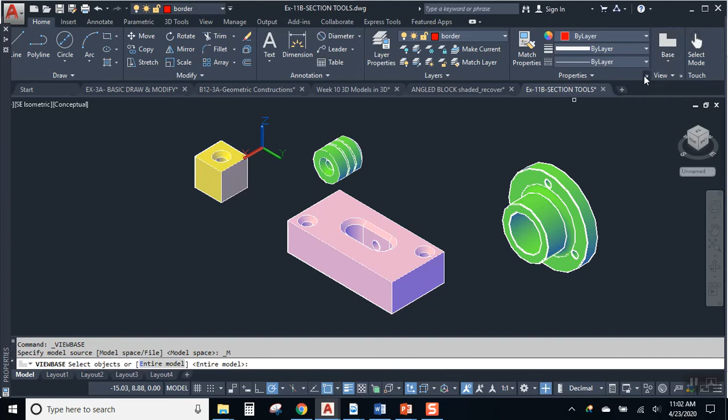Alright, so our first step is let's go to layout 1, let's see what's on it. The answer is nothing. Go back to our model. And I'd like you to use the base view command to take that first object from model space and stick it over onto layout 1. Alright, now notice when you're placing this, it's showing you the front view. That's because up here, it's selecting front view.

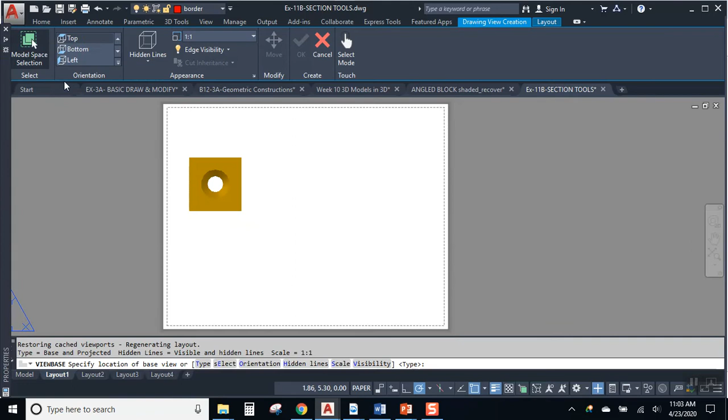We can switch this to whatever we want. We could switch it into an isometric view. We can switch it into any of the standard views. And I'd like you to switch it to top. See, this is what I'd like to see. Top view. Okay, so you can pick the view you want to have as your parent view. And then we're going to pull it down here. And enter. And that's going to give us our top and our front view, two standard views, right?

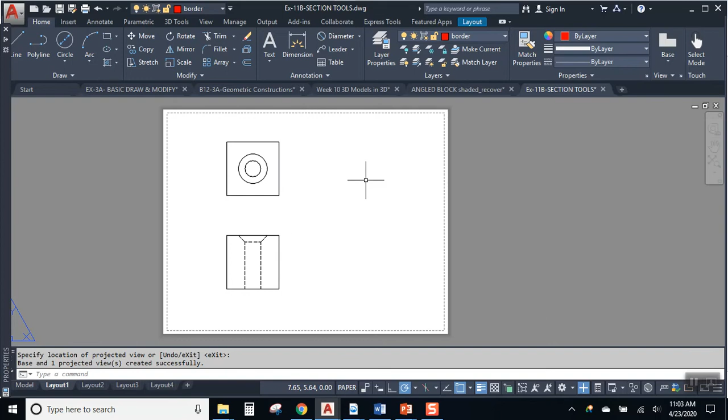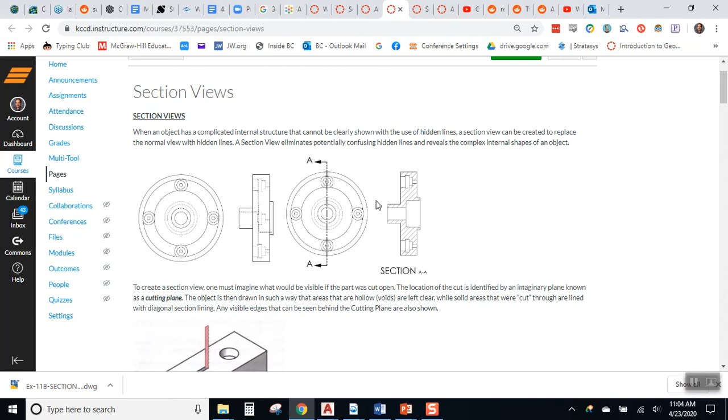So now what we can do is we can work with some of these specialized tools to create some special views. For example, I'd like to take the front view and I would like to section it. Okay, so do you remember what that means? This is one of the things we considered in the B12 class, making section views. Section views are designed to clarify where objects are solid or hollow in their internal structure. A lot of times they're less confusing than working with hidden lines, especially if the part's very complex.

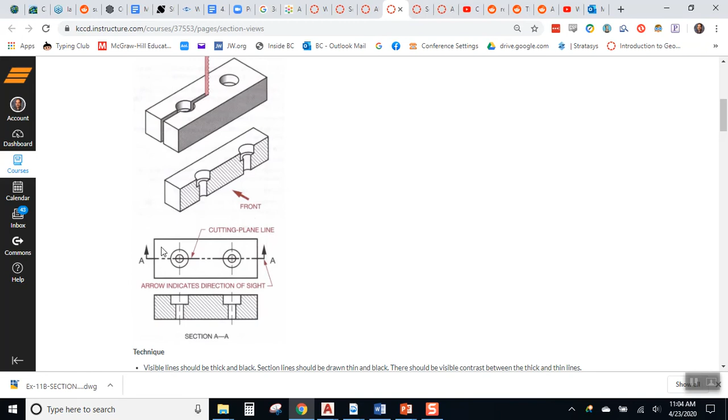So the idea is basically we're sawing through the part. We are representing the solid parts by filling them up with hatch, and then the parts that we didn't cut through anything, well, they're left blank. So on our little block here with a couple of counterbore holes, here is our top view, and here is our cutting plane line, and here is the section view that results.

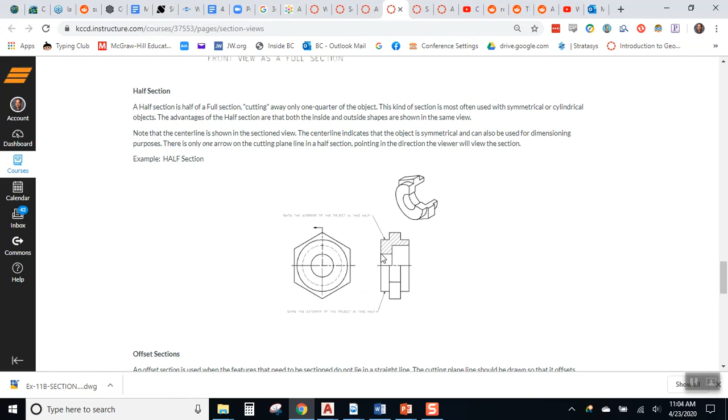Now, there's a bunch of information over in Canvas for you about sections, and we know there are full sections where you cut the object completely in half, and the resulting view is fully sectioned. There are half sections where only half of the view is sectioned, and then there are offset sections where we're cutting through a number of different elements and showing how it looks where the cuts are. Okay? So you can take a look at Canvas if you need a refresher, or you can take a look at your B12 course pack.

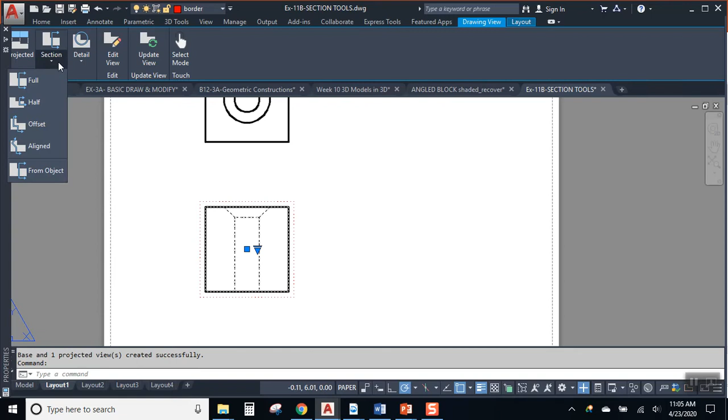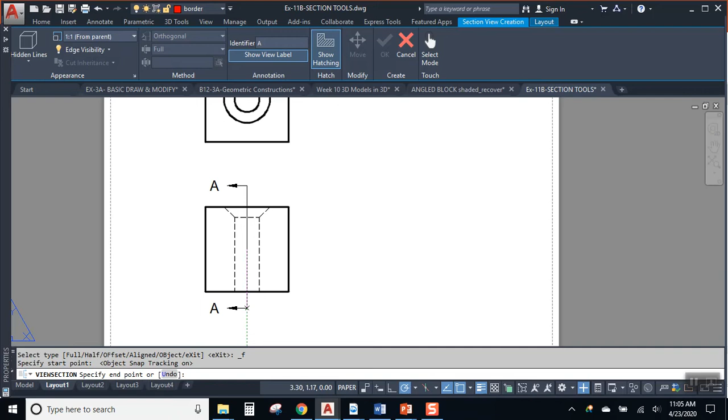But basically I want to go in and I want to say, hey, I want a section and I'd like a full section. So I'm going to use the full section tool, and what I'm going to do is I'm going to line up with the midpoint on this edge. I'm going to go click, I'm going to go click, and that is my cutting plane. Okay, now it's thinking, and as I move my cursor off to the right, we're going to see some magic happen. Alright, do you see the magic happening?

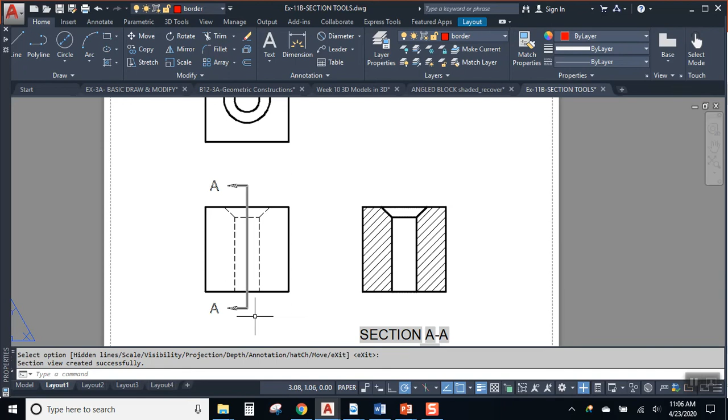So AutoCAD's able to look at your 3D solid, you determine where you want to cut open, you put a left click where you want that section view and hit OK. And now there's a fully sectioned side view off of that front view. Pretty snazzy, huh? Yeah, so it adds the cutting plane. It adds a couple of letters to identify the section. It even tags it over here and tells you the scale, which is nice, right? So that is making a section, and we can do it off of any view.

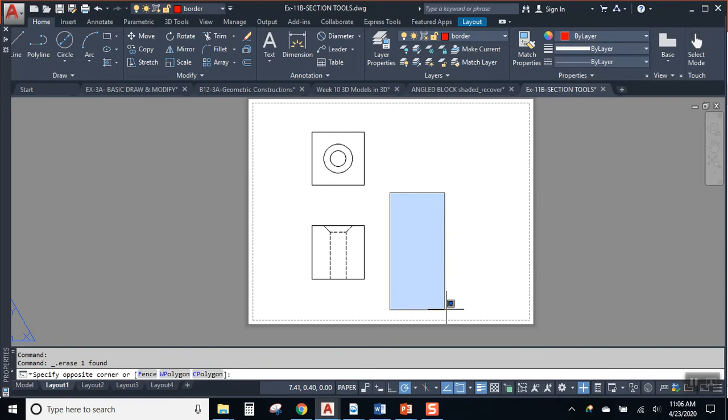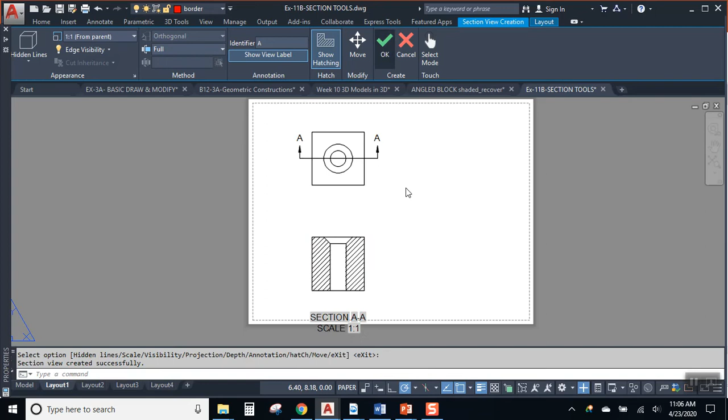I'm going to do this. I'm going to get rid of the cutting plane line, and notice what happens when I get rid of the cutting plane line. You see how the section view disappeared? Because the section view depends on that cutting plane. I'm going to get rid of the front view, and I'm going to click on the top, and I can run a section through the top. I'll just use the center point of the hole as my location. Alright, and now my front view will be drawn as a section. Looks pretty nice.

Okay, let's go back to our model. So that took care of our first model, our first solid. Our second one's going to be this guy here. I'm going to run a base view from model space of this part.

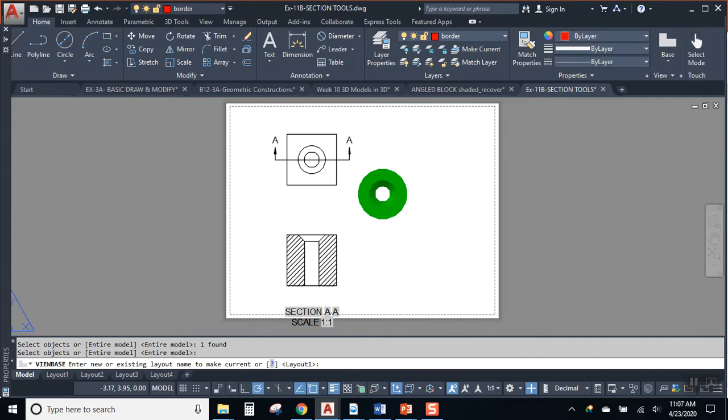And whoops, I don't want it on this sheet, do I? So let's go back. Let's go to our next layout, layout 2, which is blank. Okay, now I'm all queued up and ready to go. Now when I do this, AutoCAD will know, hey, go to the last active layout. I'll pick this guy. And now here's what we got, right?

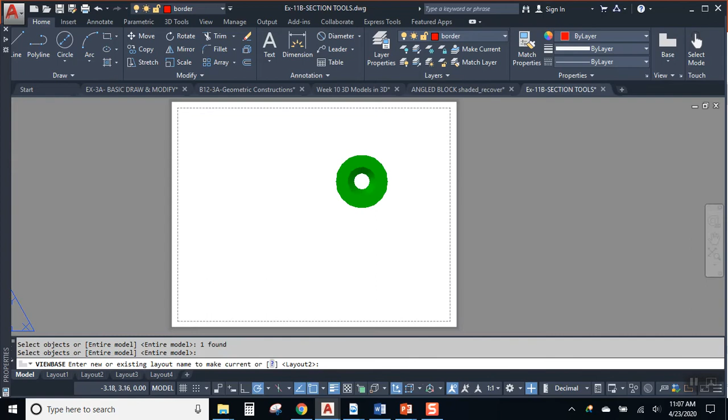So I would like the front view on this one. And that's all I want. So I'll hit OK. And I'll hit Enter. And there's my front view. All right, so that's confusing. There's a lot of weird stuff going on there. So what we'll do is we'll click on that front view, and we'll say, give me a section. But this time I want a half section.

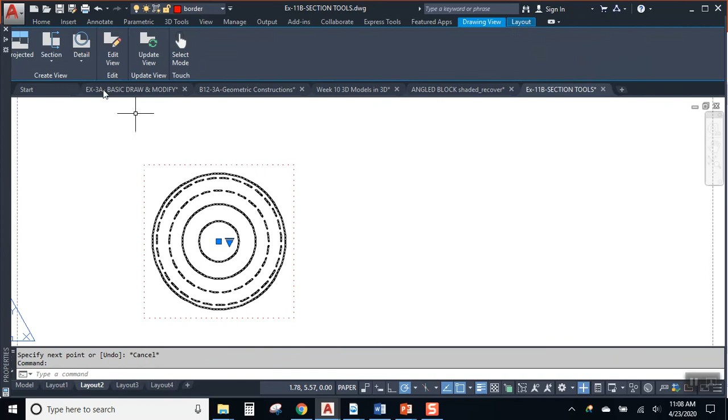So now check out how this is going to work. I'm going to find the center point. I'm going to track over. I'm going to start my cutting plane. No, I'm not going to do that. I'm going to start a half section. I'm going to find the center point. I'm going to track up. Now, what I want to do is this. I want to cut through it from the top to the center.

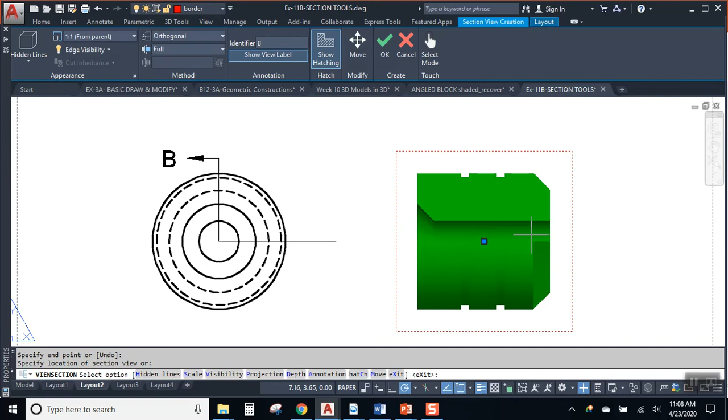And I'm going to left click out here. And on that second click, do you see what happened? It's generated my view. I will left click out in space and hit OK. And now check it out. The top half is sectioned, right? Because we're cutting out that part. The bottom half is just what the part looks like on the outside. Pretty snazzy. Okay.

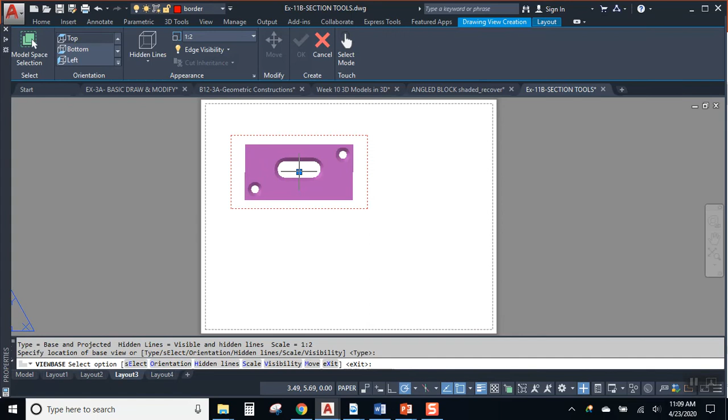Let's look at layout 3. Layout 3's got nothing on it. I'll go back to model space. I'd like to take the tissue box looking thing here. I'd like to send that over to layout 3. So select, stick it on there. This time I want the top view, and I'll hit OK. I don't want any more views, so I'll hit Enter. Okay. And here we go.

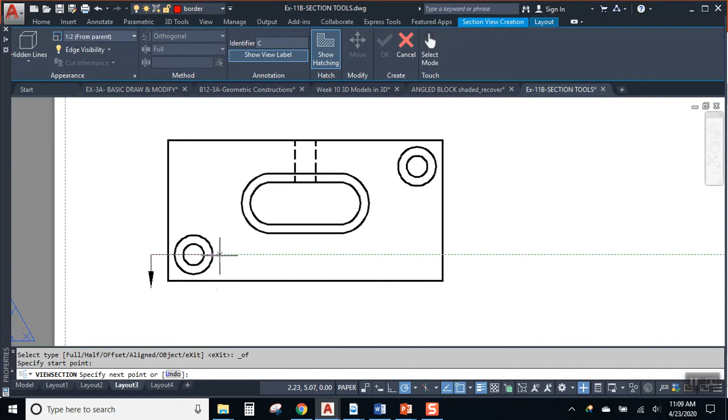I'm going to pick section. I'm going to pick offset section this time. And now check it out. I'm going to line up with the center point on that hole and click and go through the hole. And then when I get a little bit past the hole, I'm going to click again. And that's going to let me bend my cutting plane line. Okay, and then I will line it up.

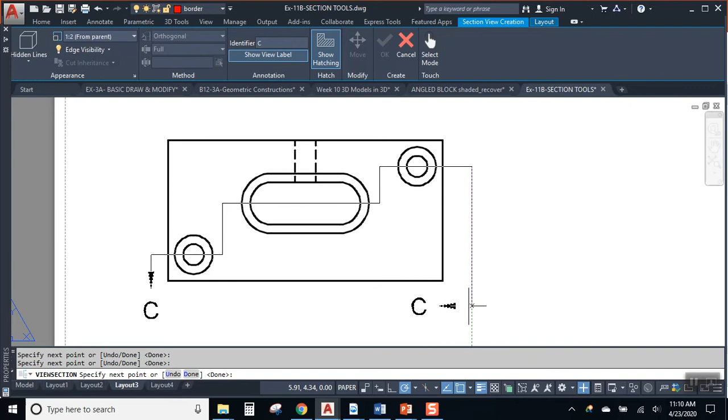With the next element. And then I will bend it up again. I will line it up with the next element. And click one last time. And then when you're all done clicking, hit Enter. And if we take a look, we see our cutting plane has zigzagged through the part.

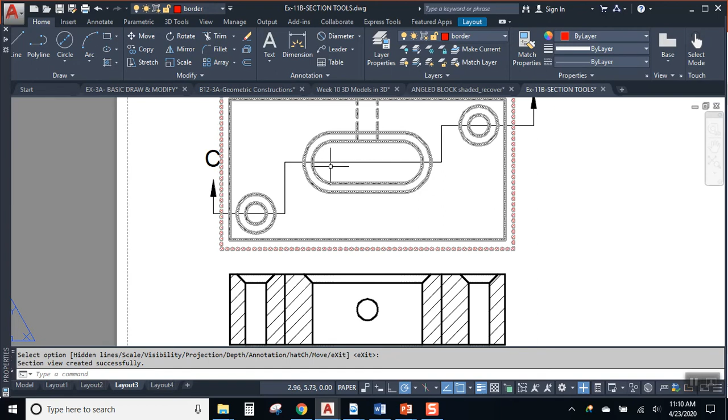And then down here in the front view, it's going to create a view that looks exactly like what this would look like if we sawed through it, right? Because the hole here and the slot and the hole here are not in one straight line, but the cutting plane is passing through all of them and showing us what we would see if we did cut through all of them. Okay, so that is our offset section.

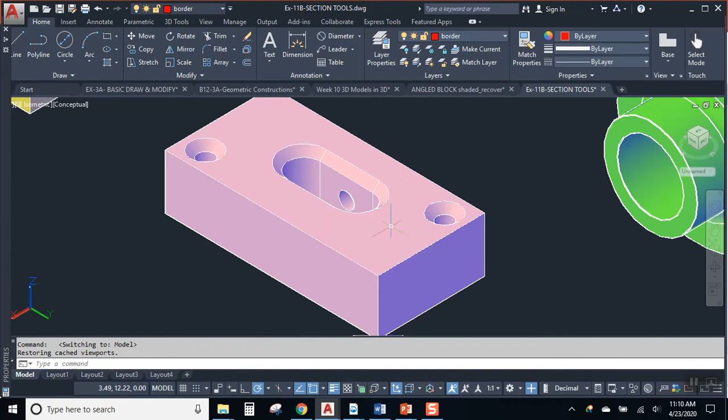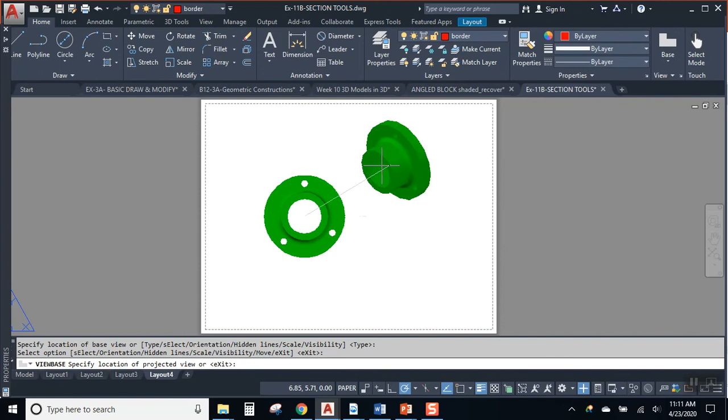Let's go to layout 4 now. Here's our last layout. Let's take a look at the model. This looks familiar, doesn't it? This is something that we drew earlier in the semester. This was that rod support, except now it's a 3D model. We're going to go to base view from model space, enter, send it over there, plop the front view on, hit OK. Now you can stick the top view in if you want, that's okay, but that's all we want for standard views.

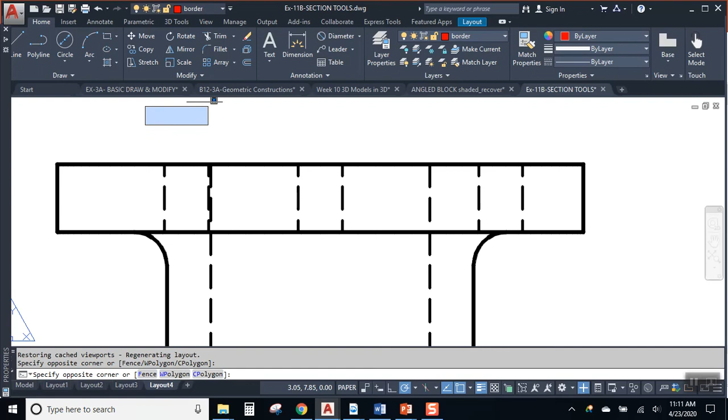And we see that there's some strangeness going on. Take a look, right? It's kind of weird, the locations of the holes here and here, because what AutoCAD is doing is it's projecting exactly what's there, right? And that can be kind of confusing. So let's get rid of that. What we're going to work with is that aligned section, which is our last section.

So I'm going to start by lining up with the hole at the top. I'm going to go through the center point of the flange, and then check it out. Going to go at an angle. Let's just set it for every 10, right? So here is 10, here's 20, here's 30. Okay. So now look at my cutting plane, how it's passing through the top hole, through the center point, and it's going through this secondary hole.

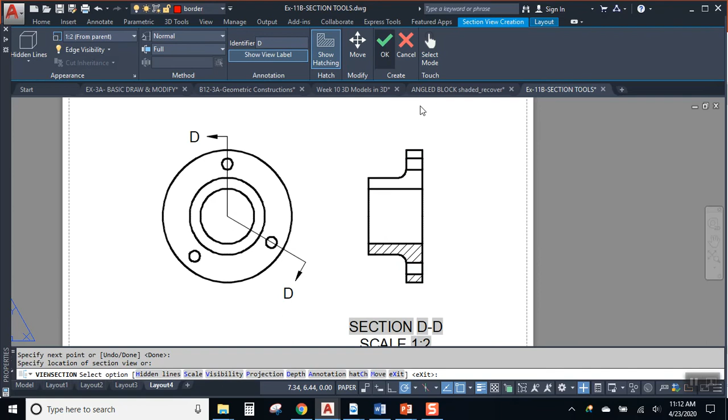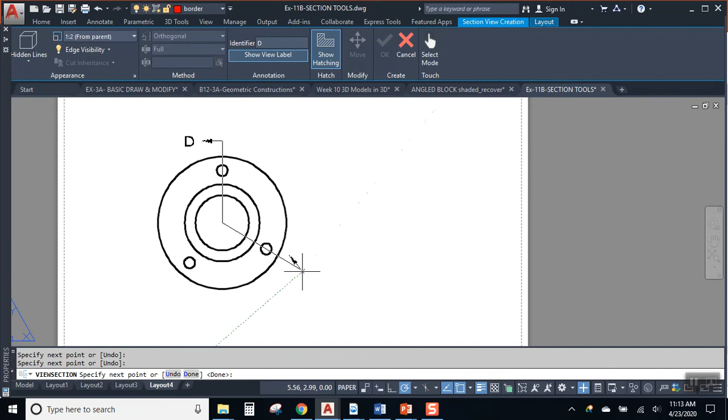And I will click and hit enter, and look what we get over on the side. Ta-da! Yeah, so, interesting. What did it do there? It didn't do the hatch up on top. I wonder why. AutoCAD, stop making me look like a dope, please. Okay. One more time. We'll go clicky, clicky, clicky. And enter. And click. And okay. Alright. Well, let's see.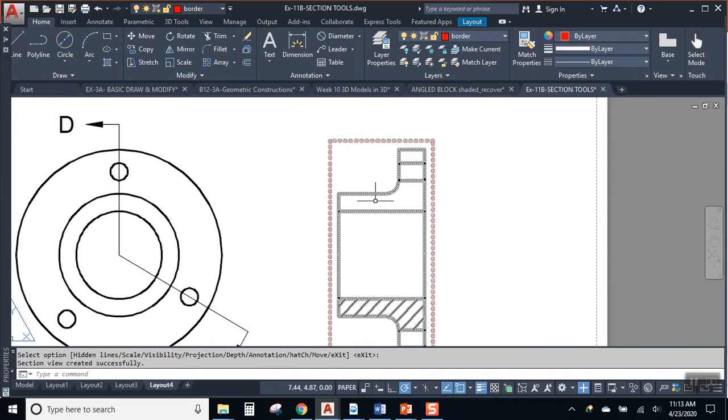AutoCAD 2021. Is that what I'm working with? That shouldn't be happening. That should be solid with hatch. This should be solid with hatch too. I'm not sure why it's fighting me, but it is. And you know what? I'm not going to beat it up too bad. Okay.

I'll get back to you on that one.

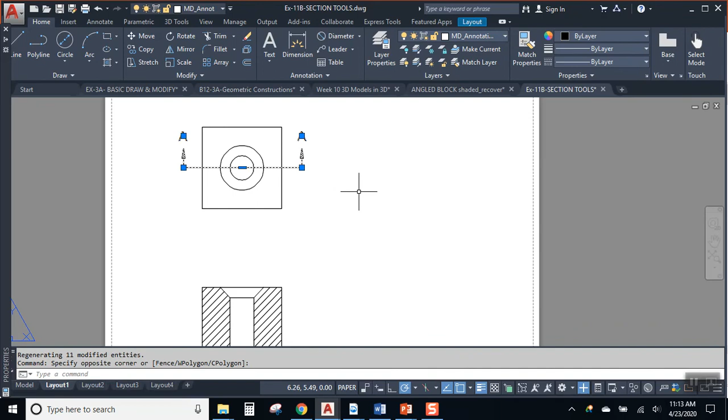So now let's take a look at a couple things. The cutting plane. I showed you earlier what happens if you get rid of the cutting plane. The cutting plane generates the section. So if you lose the cutting plane, you lose the section also.

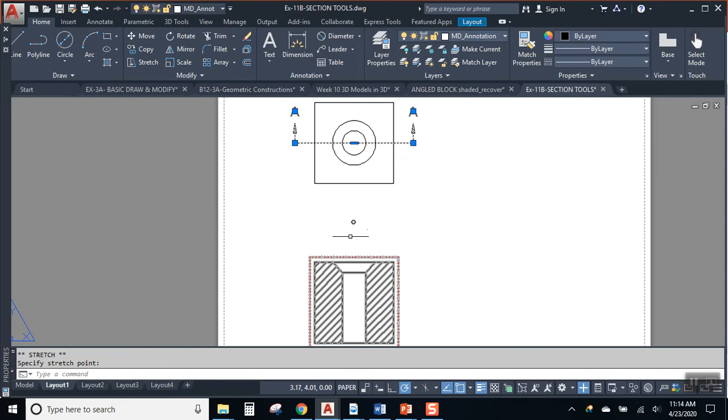The cutting plane is live, which means if I move the cutting plane, do you see what just happened to the section? See, the section will update based on the location of the cutting plane. If we're cutting through nothing but solid, it's all solid. If we cut through a little tiny bit, then we'll get a little tiny bit. And if we get it back in the center, now it's cutting through the whole thing. So that's kind of cool. The section will automatically update if you move your cutting plane.

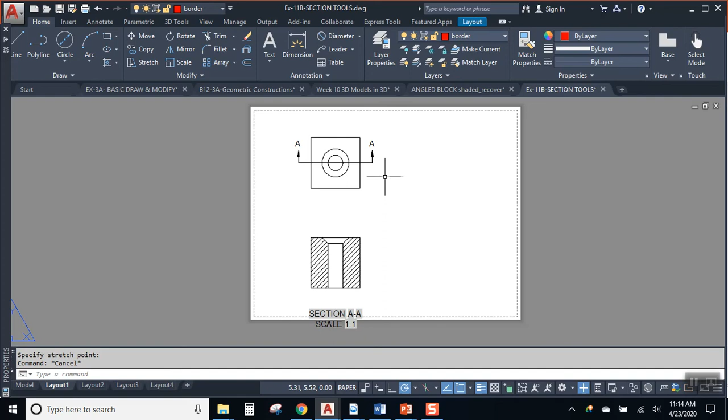Some other cool things that we can do. I can click my section view and I can project it as an, wait for it, isometric section. Snazzy. Now this would be a pain in the neck to have to draw it, but look at how nice AutoCAD just did that for us, right?

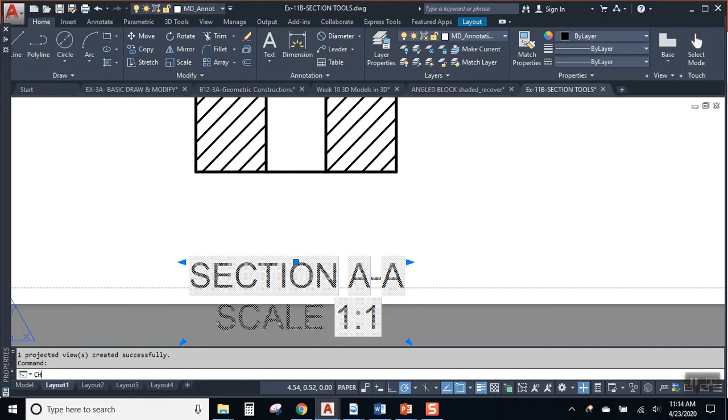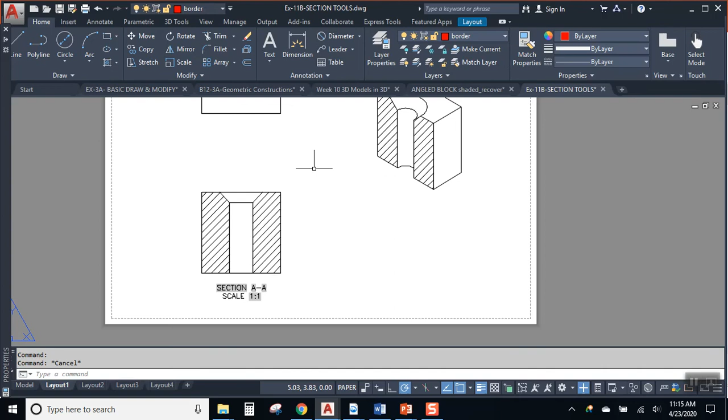The tag that AutoCAD puts on here is nice, but I'd like you guys to change yours up. The tags should be Romans for a text style and an 1/8 inch tall. If you're asking why is it so dang big and why is it the wrong font, it's because there's a style that controls these generated views and tags, and we could go in there and we could work with the style, and we could update a style or create a style, but I'd rather not do that. We can easily change the size of the text and the style of the text without having to update a lot of stuff.

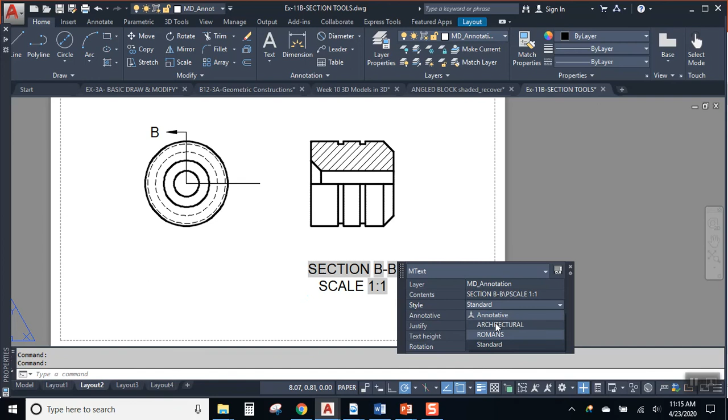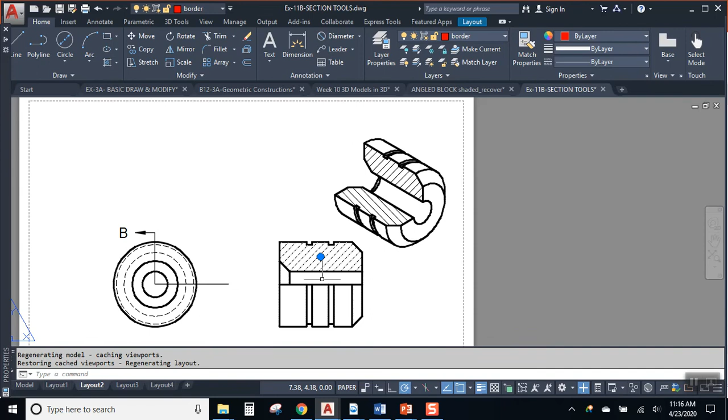Okay, so that's good to go with a nice projected section view. I'll do the same thing here, and maybe for this one I'll use quick properties. The style should be Romans, the height should be 0.125, and I can pull a projected view off of here. Projected, there we go, as an isometric section. Again, that's just awesome that it'll do all that work, so you don't have to.

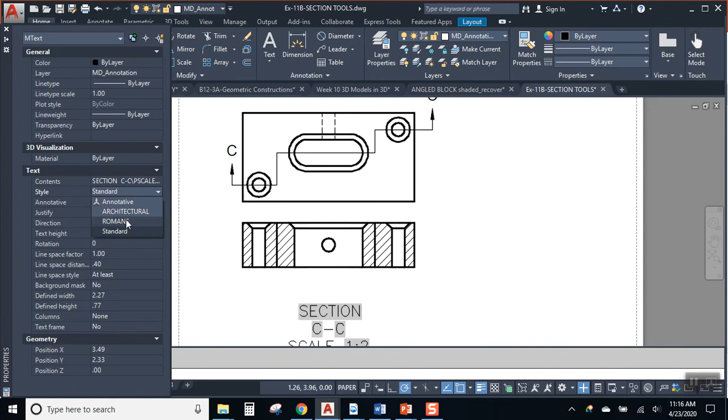Here is our offset section. That's going to be Romans style, 0.125. Cool. We can project isometric section off of here. Big honkin' mama.

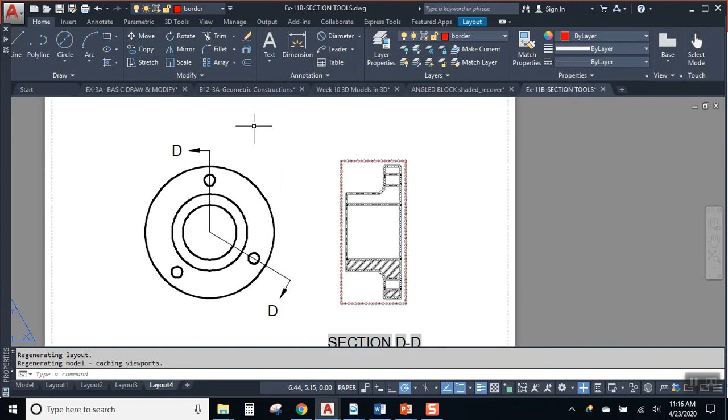Now, the only one we can't do a projected section off of is this guy here. At least we couldn't in the last version. Let me see if that's updated. Projected section, it says no. Yeah, so the aligned section won't project for you into an isometric. That's okay. We can deal with that. But we will change the style and the text height.

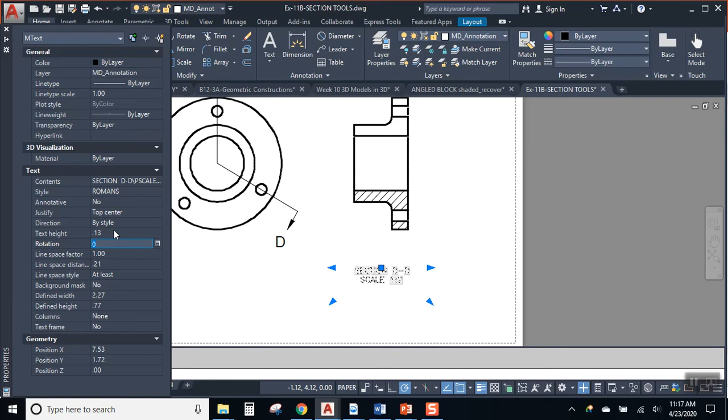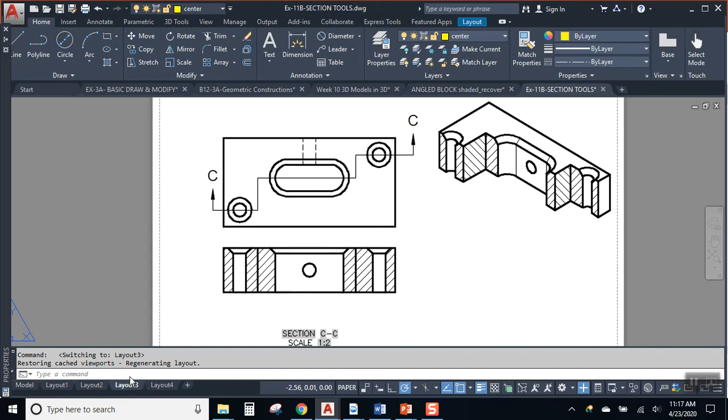What other sorts of things would you need on these drawings? Well, think about it. You're going to need center marks, you're going to need center lines, right? So all of those things that you would normally need would have to get added, and they're easily done. The tool is pretty cool. There is only one thing that it doesn't do right, and I want to show it to you over here.

Can you identify what's wrong with the front view? So there's something wrong with the front view. And I guess this is because AutoCAD, a lot of it is driven by software engineers and not so much by people that have a tremendous knowledge of technical drawing, which is surprising. But there's something wrong with this front view. Do you know what it is?

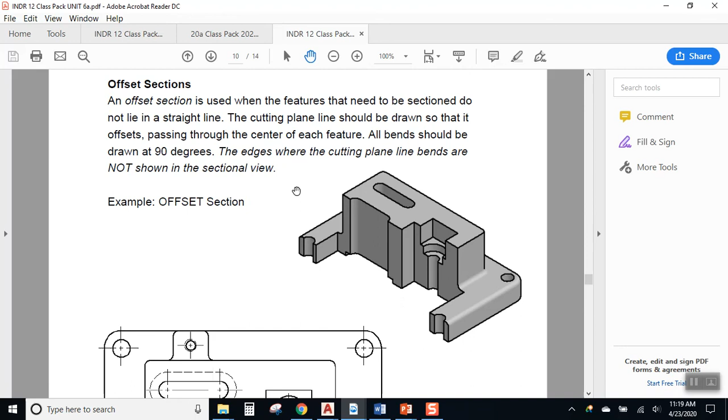So if you're having a hard time figuring that out, no worries. This is more or less the same idea, this model here. Take a look at this model, and take a look at our CAD model, and you're going to see that it's added some stuff in this front view that we don't need. Do you see it yet? See, when the cutting plane bends, there shouldn't be a line. When the cutting plane bent there, there shouldn't be a line. The cutting plane bends here, there shouldn't be a line. And this is a convention in technical drawing.

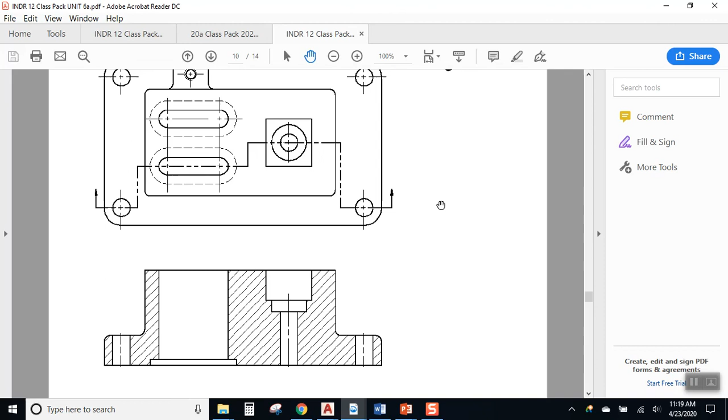There shouldn't be a line because, look, we're not really cutting this thing open, are we? No, we're not. We're drawing it under the idea of where is it solid and hollow as the cutting plane passes through the object. So, unfortunately, this is just one of the things with AutoCAD's section tool that has not been updated. It adds that vertical line there, and it adds a vertical line there because that's where my cutting plane bent. You know what, it's not right, but it is how it is, and we're just going to deal with it. But if you notice that or you're wondering about that, you're absolutely right. It shouldn't look that way.

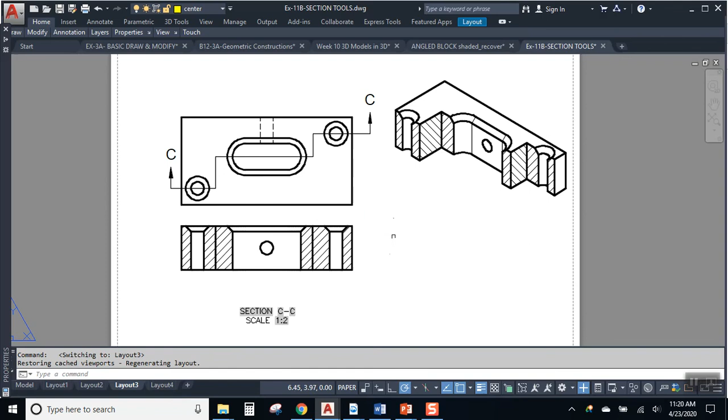Okay, so these are the section tools in AutoCAD. And we are ready to go on to our big assignment now.